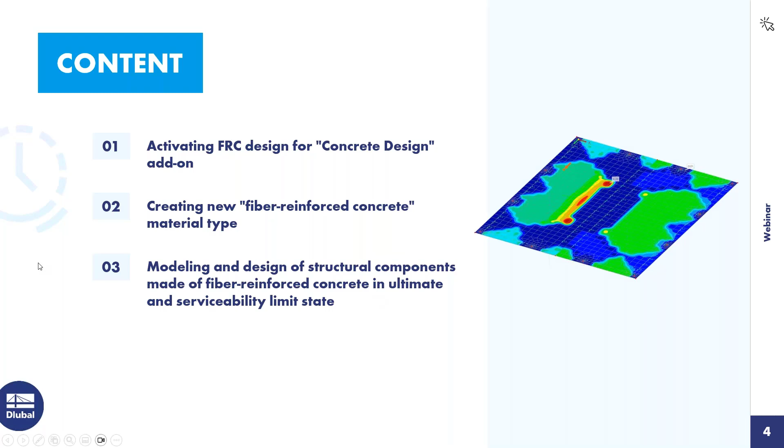Please email questions to info@dlubal.com. For today's agenda: Paul will activate the fiber reinforced concrete design by creating a new material type, then he will model and design the structural components and perform a design for the ultimate and serviceability limit state.

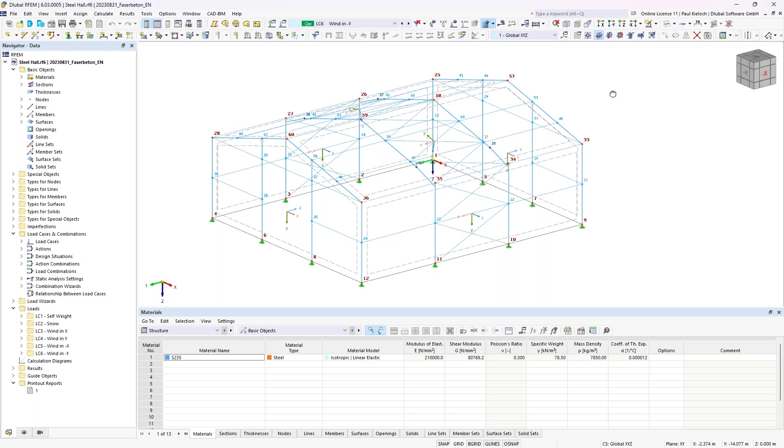As a short overview of this structure: I have nodal supports here on which I will get support reactions. These support reactions will give me the loads for the slab. I have basically 6 load cases - self-weight, snow, and 4 load cases for the wind load. What's also important to mention is the numbering of the nodal supports or nodes, which I will use again in the second file where I enter the slab.

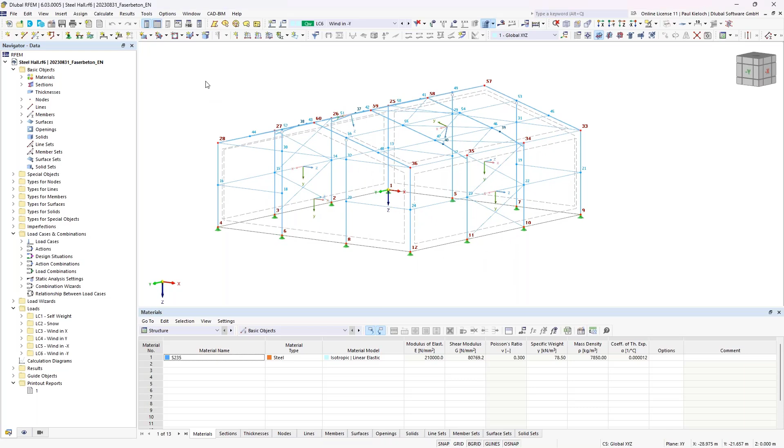So I will create a new file. What's important now is that the steel building and the new file for the slab are in the same project folder in our Dlubal Center. That's important regarding the new option in the load wizard to take over the support reactions as loads. I'll come back to this topic and mention it again later.

Now I'll just enter the name here - that will be foundation slab - and I will activate the concrete design add-on. So what I'll show you today is basically part of the concrete design add-on. We will create a fiber concrete material, and the design itself runs in the add-on for concrete design. For the standard, I will use the national annex for Germany, but the features I'll show you today, the design approach and equations, are also part of the other national annexes for Eurocode 2.

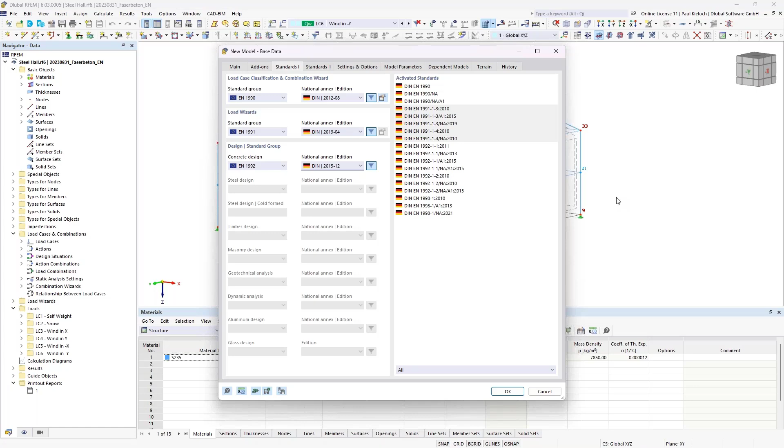Okay, that's basically all. One thing I have to check is that the Load Wizard was activated, because we will need it afterwards. That looks good - can confirm it.

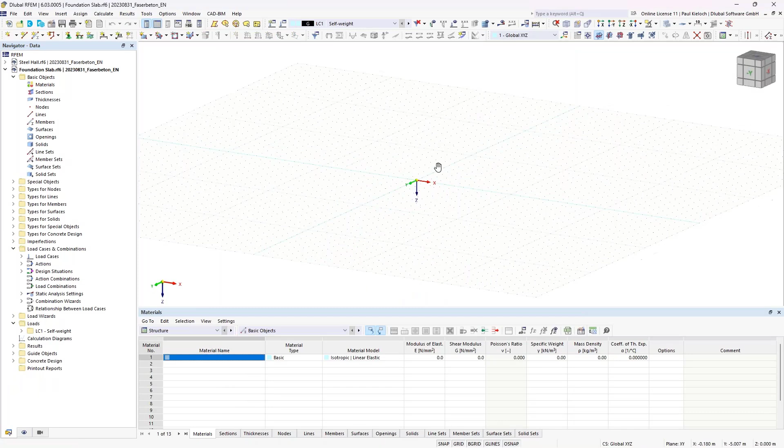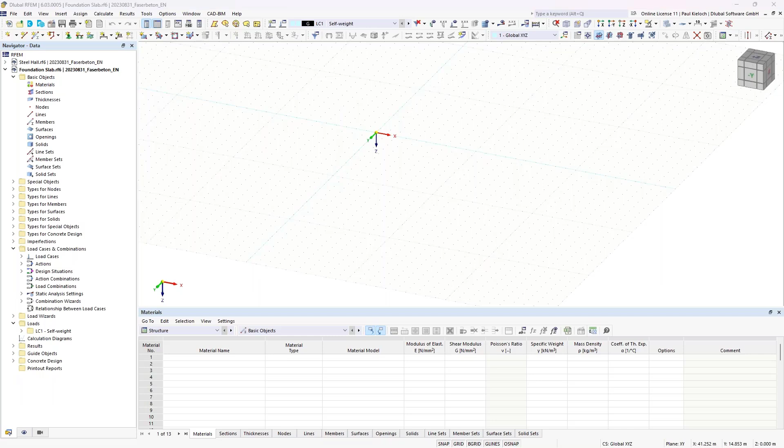A new file was created, and I'll switch back to the structure with the steel building. I'll select my nodes here, and with Control C and Control V I can import it here, copy and paste.

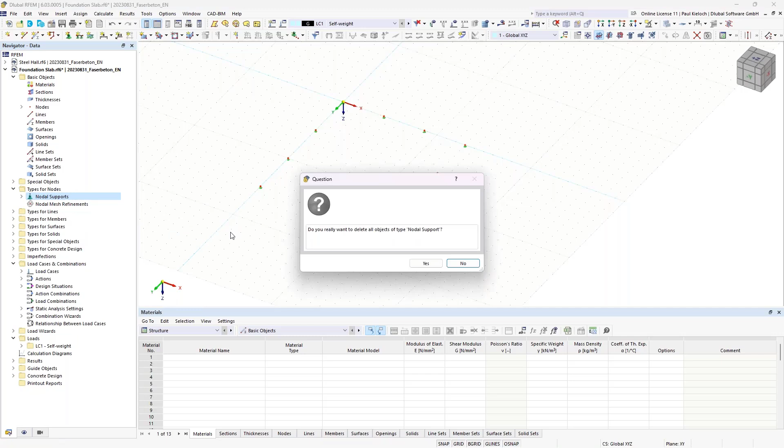So we now have the position of our nodes with the columns from the steel hall, and I don't need the lines or the nodal supports here. So I can delete the lines, open this chapter types for nodes, delete the nodal supports as well. What we now have is just the nodes for the columns.

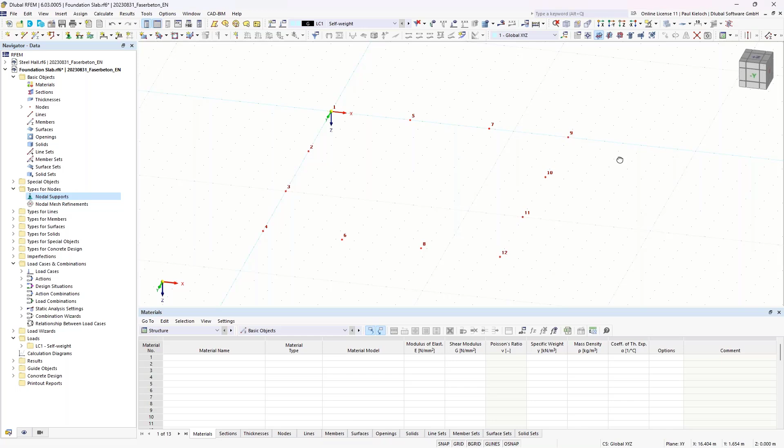If I right click and activate the numbering, we see exactly the same numbers as in our file with the steel building. That will be important afterwards if we transmit or transform the support reactions to nodal loads. I'll switch off the numbering just to have a clear overview of the structure.

Next topic is creating the material for the slab. I'm entering a new material, going to the library, and selecting this fiber concrete. Fiber concrete was already implemented in previous versions, so it was already possible to create a slab with material type fiber concrete.

But what's new in the latest version is that slabs with material type fiber concrete are now also considered in the concrete design add-on. That's basically the new feature I'd like to show you today. So I'm setting up the filters here and selecting this material.

Now you see this material type fiber concrete. If that material is assigned to a slab, the concrete design add-on knows that it has to use the approaches for fiber concrete, or fiber reinforced concrete material, in the add-on.

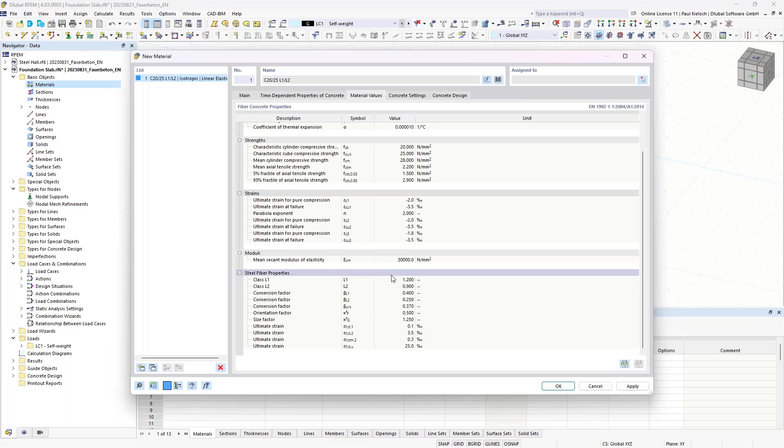The next material I need from today's example is steel, reinforcing steel. I'm setting up these filters once again, and then we can select reinforcing steel, and I'll use this B500 here.

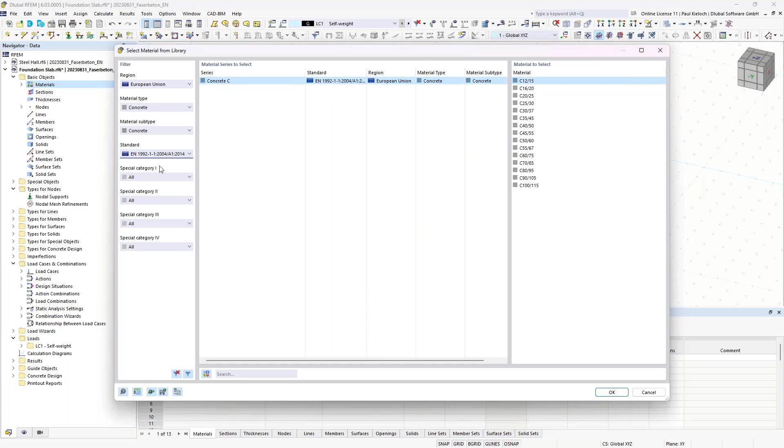Afterwards I'll also do a comparison between this fiber concrete and a normal concrete. So I'll create a normal concrete material, concrete and Eurocode, this one here. So basically I have both concrete materials, C20/25, but the first one includes fibers or fiber reinforcement, and the third material here is a regular concrete material.

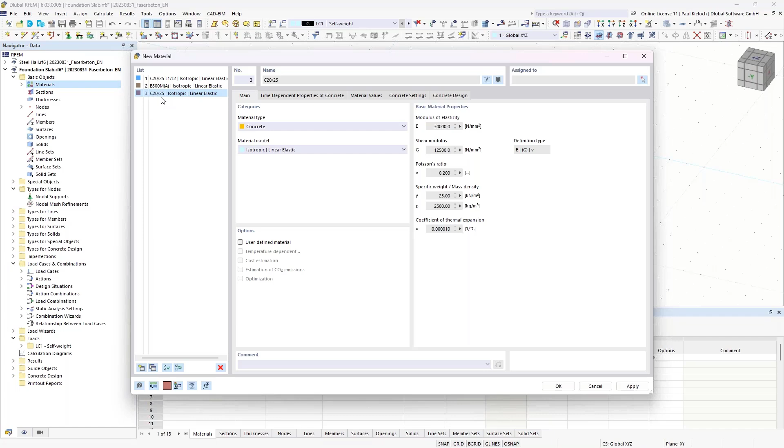Confirm that, okay. The next topic is entering a thickness for the slab, which will be 240 millimeters - once with this fiber concrete, and for the comparison with the regular concrete.

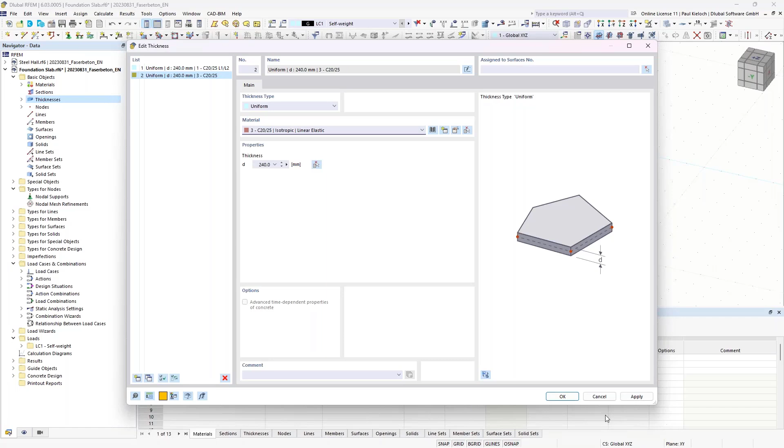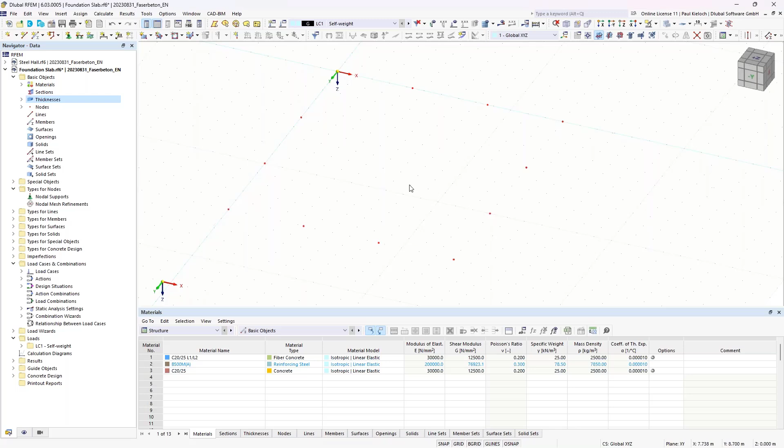So now we could import or enter the slab. I'd like to have a spacing of the edge of the slab to the center of the columns of 30 centimeters. To enter it graphically, I just modify the grid here, entering 0.3 and 0.3 in both directions.

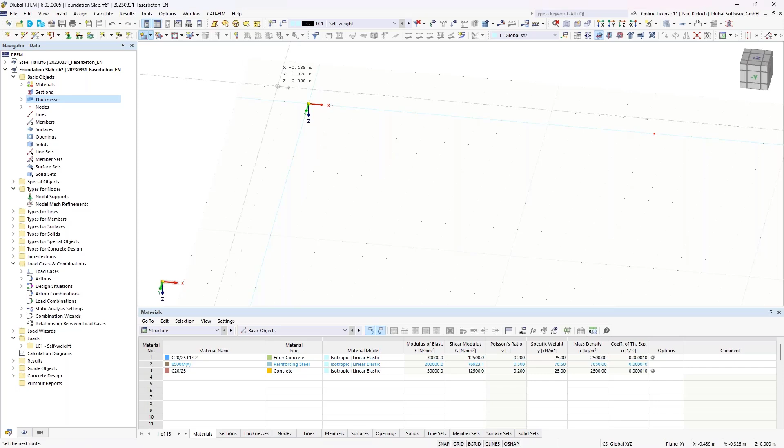Confirm with OK. Now I can enter the slab with the thickness of 240 millimeters and the fiber concrete material, click OK. Then we have the first point here and the second one on the other end, and here I just have to modify the origin of the grid, and then it looks like this.

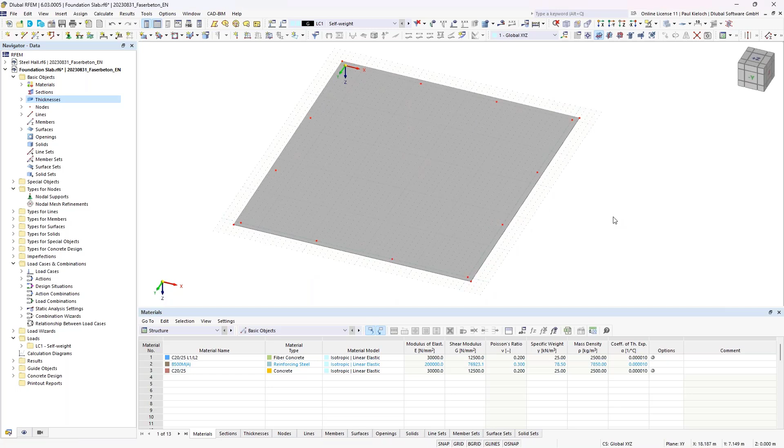And the slab was entered. Just to have a better overview, a clearer overview, I will switch off the grid and also the snapping points of the grid.

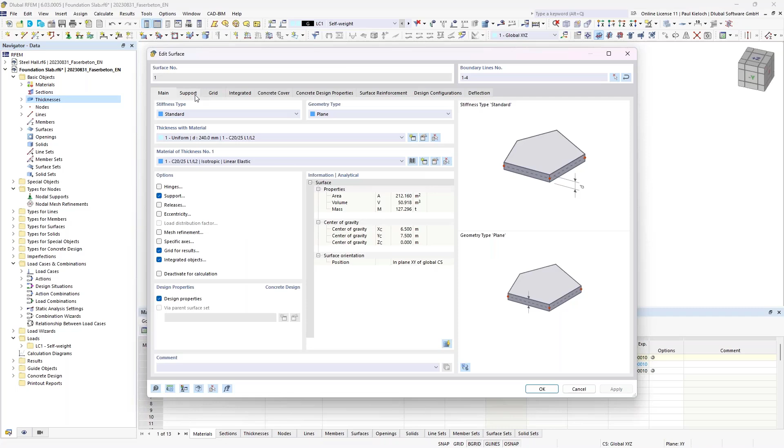Next topic is modification of the slab itself. So we will first enter supports here. I will use a surface support with random stiffness. I could probably also enter a solid with the geotechnical analysis add-on, but that would be more time intensive, so I'm just using random spring constant for this example today.

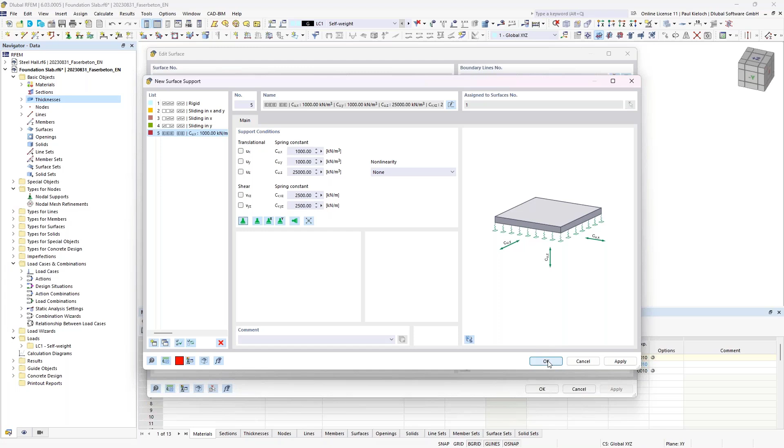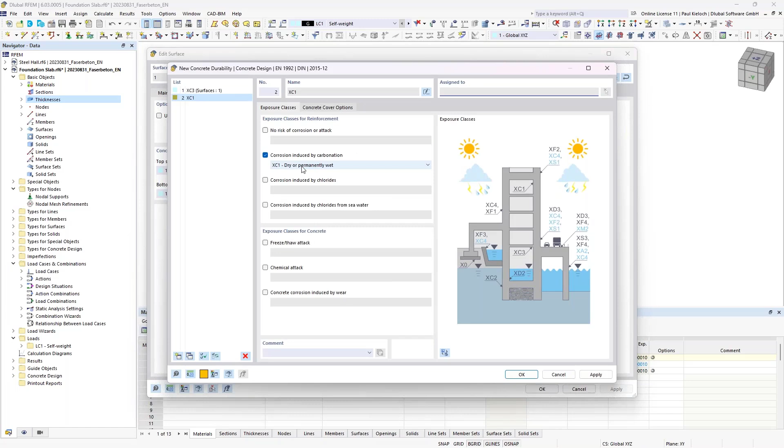Entered. The next topics are regarding these chapters for concrete design, so we have to check our concrete covering. I will use XC3 at the top side, and at the bottom side I will create a new one, and this should be XC1.

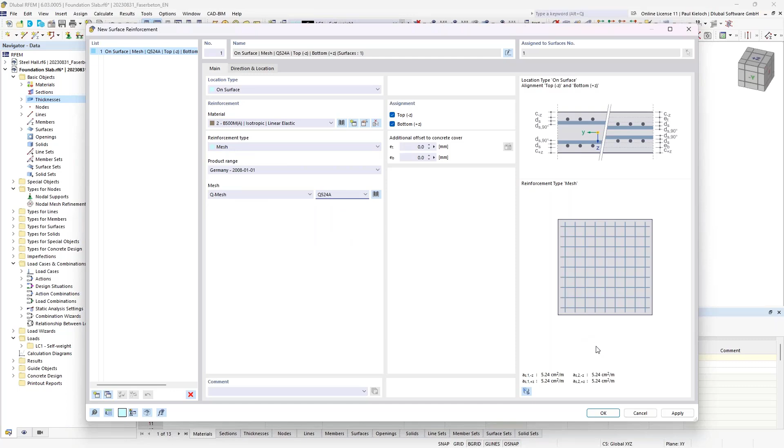If you now wonder why these values won't be applied here, that's because the surface reinforcement is missing. I will just enter it here with a mesh, using this mesh from the German product range. If I confirm that and go back to the concrete cover, then you see that the concrete covering was applied correctly.

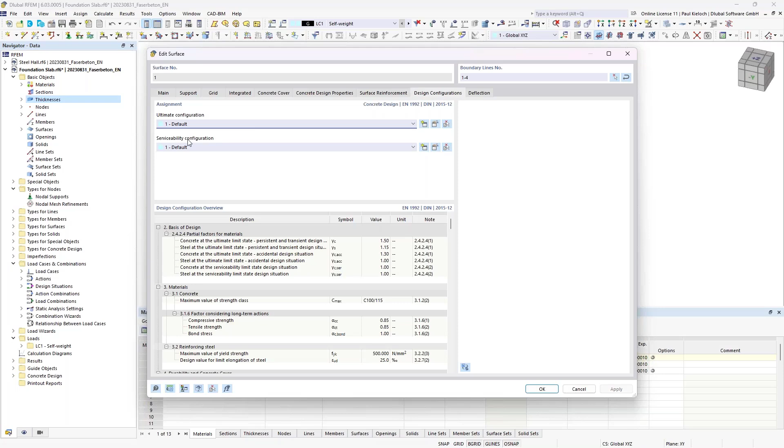What I have to change or modify in the tab with the design configuration is regarding the serviceability configuration. If I'm designing a foundation slab, I can think about changing the setting regarding the AS-min calculation due to restraint. In my example, I would like to use pure tension restraint, so I'm switching this option to pure tension restraint.

And what's also possible, or at least according to the German National Annex and the commented version of the German National Annex, it is possible to reduce the tensile strength of the concrete by a certain factor. It's depending on the thickness of the slab. According to the German National Annex, it would be possible to use the reduction factor of 0.65 for slabs up to a thickness of 30 centimeters, so I will do so for this example.

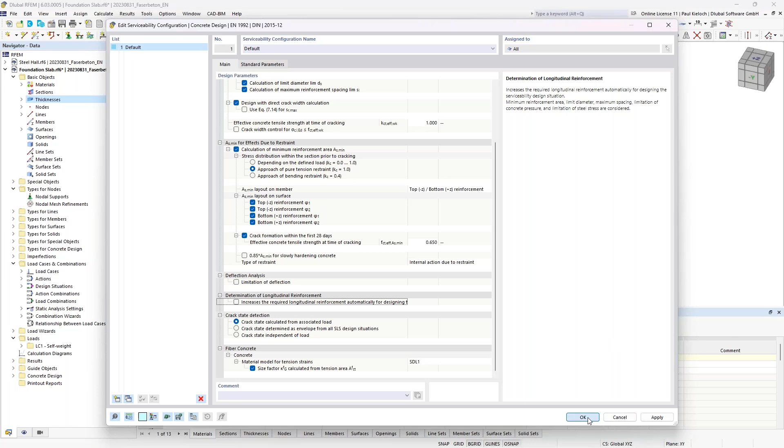For this example, I would like to deactivate the deflection analysis because that's not required here. I will also deactivate the automatic increasing of the longitudinal reinforcement for serviceability. That's basically all I have to change in the serviceability config. I confirm that once again, and then we see our slab already with the reinforcement. Just to have a better overview, I'm deactivating the reinforcement so we see our pure concrete slab.

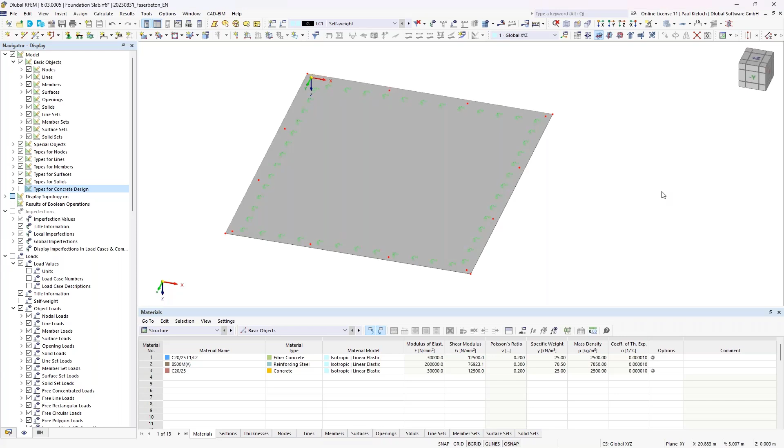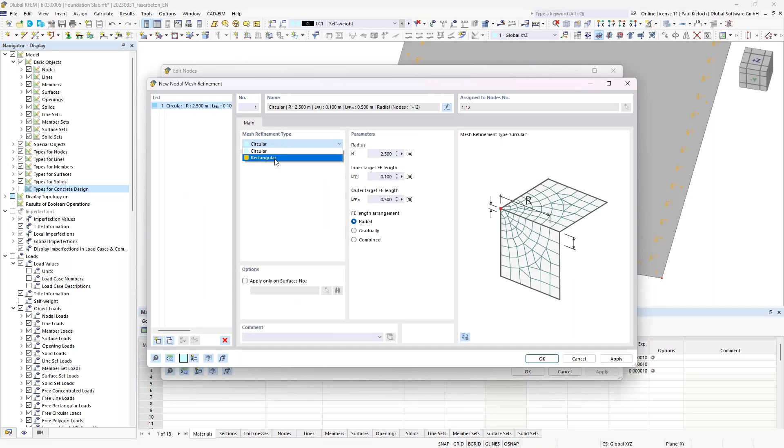Okay, the next topic I have to enter is the FE mesh refinement on the nodes. I'm switching maybe to this view. I'm selecting all the nodes on which I would like to apply the load afterwards, and I will assign a FE mesh refinement, using this rectangular one with a target length of 5 centimeters in the first element next to the node.

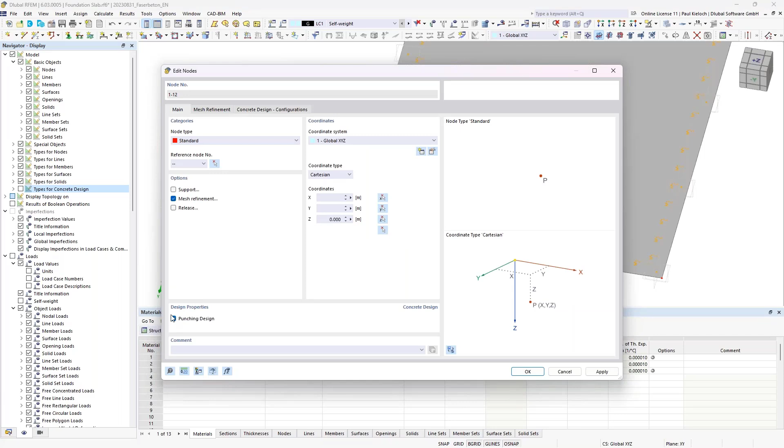And what I would like to activate in the same way is the check for punching. If I do so, then this tab appears with the configuration for punching. In this example, we have to check the configuration regarding punching because we haven't entered any columns, so the program has no information about the section dimensions. In the current setting, the program would not be able to generate the perimeters for the punching.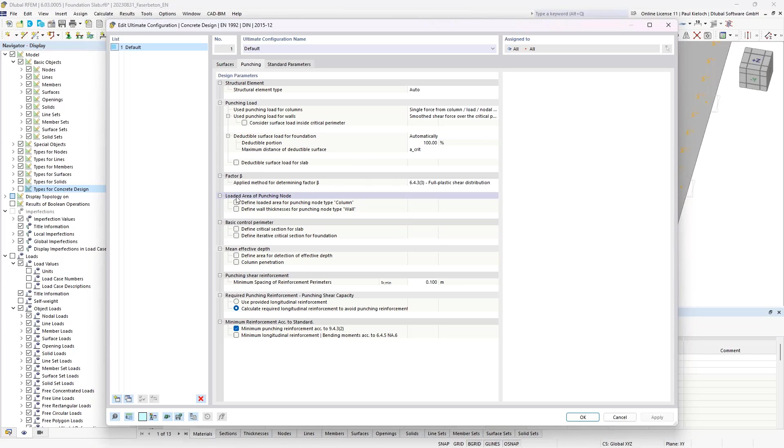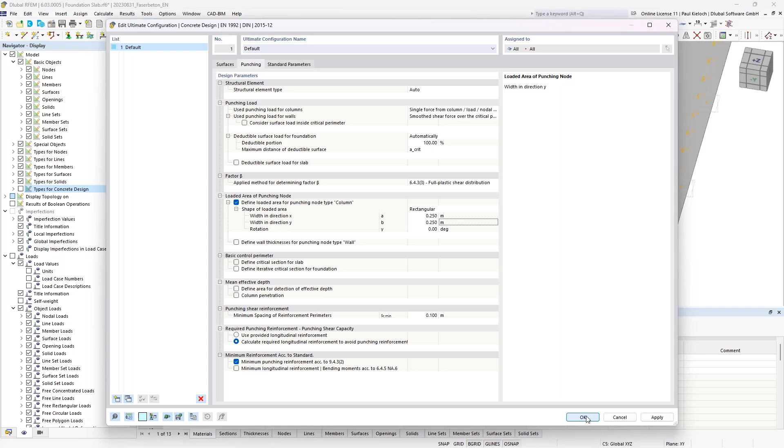So therefore I can define a loaded area, and I would use 25 centimeters in both directions for these nodes. With this setting I will be able to do the design checks even if I do not have a cross section entered for the columns. That looks good, we'll confirm that.

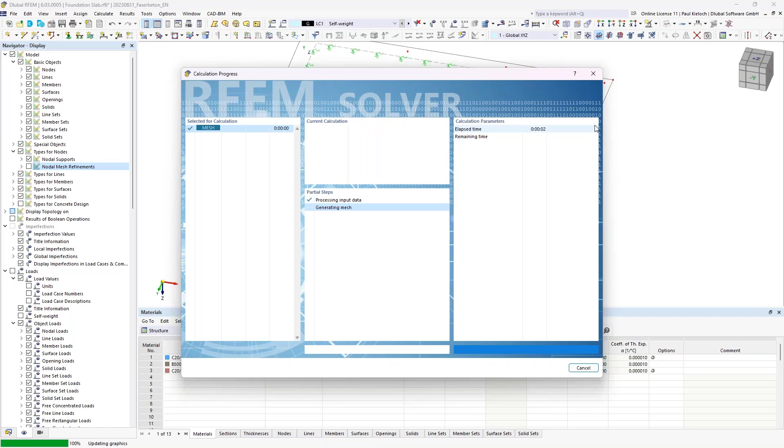If I switch to the wireframe display mode, then we see these nodal FE mesh refinements. I will deactivate them, and if I generate the FE mesh, then we see that all refinements were activated or considered correctly.

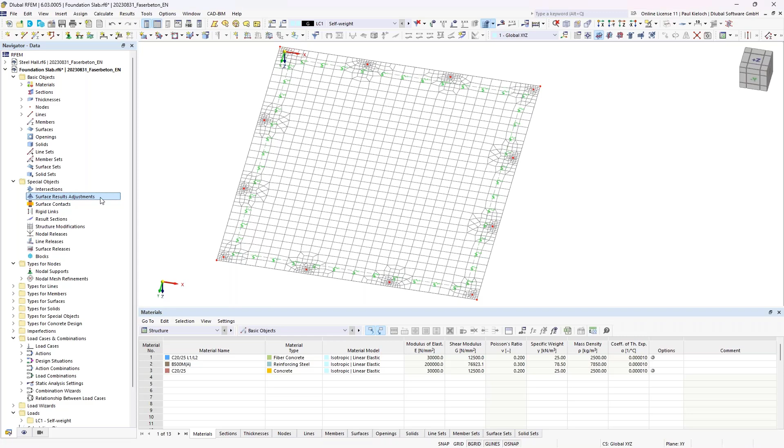And the last topic I have to enter regarding the FE mesh is in the special objects, the surface result adjustment. I would like to use smoothed results inside a certain result adjustment, so I will enter them here for slab number 1, and they will have a dimension of 0.5 meters, and the first one is here. Can confirm that.

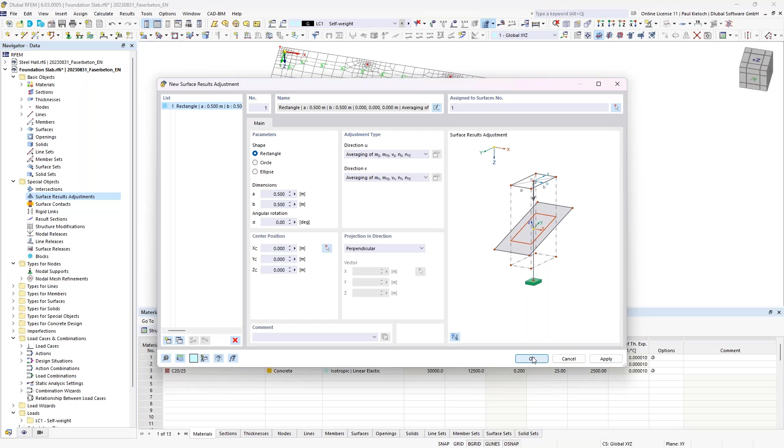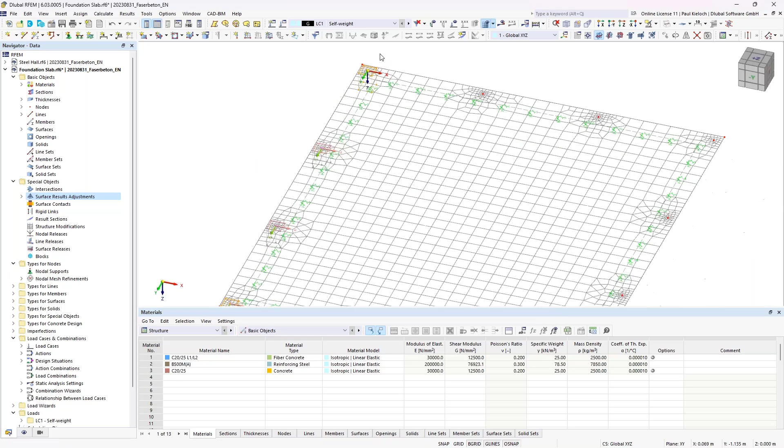And now I can select it, click on copy 3 times from that point to that point. And then I will take these here and copy them also 3 times, but this time from this point to this point.

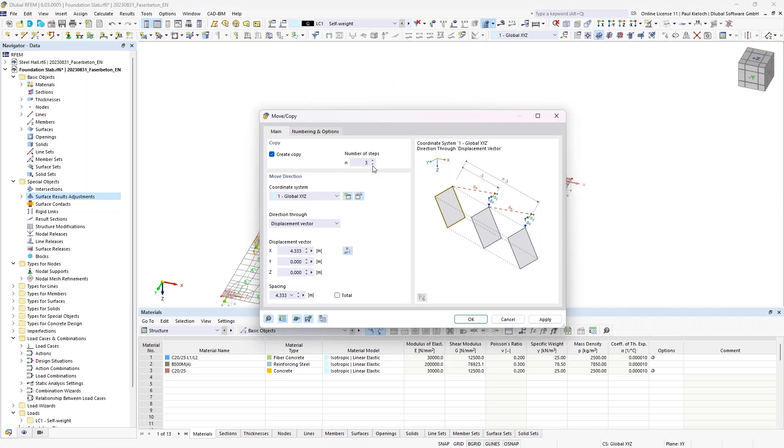And then I will select these two. Just one copy from that point to that. So, okay.

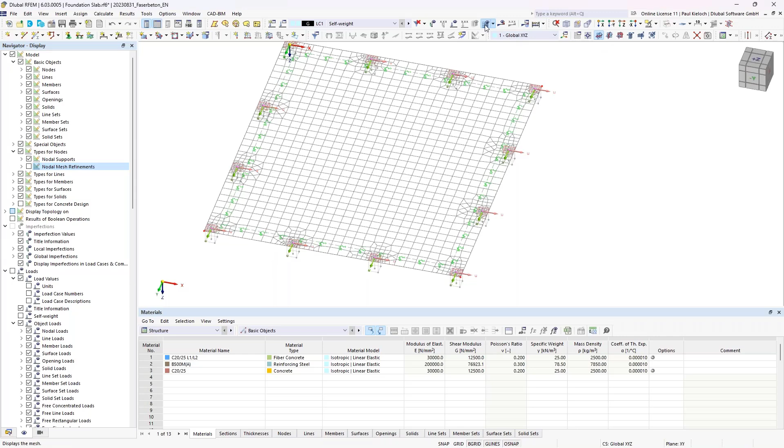And the surface result adjustments are now entered. I can just check whether they were applied. Yeah, looks good. So just to have a clear overview, I can deactivate the mesh and also switch to the result objects and deactivate here the surface result adjustments. Okay, that looks quite good so far.

So I will just save the file and now take care about the loading.

As I have already shown you in the steel structure, we have here 6 load cases from the steel structure. I will enter them here, so therefore I'm opening this dialog.

The first one is self-weight, it's okay. Already the second one was the snow. Then we have wind in plus X. Okay, and then I can just make plus Y. Then minus X and Y. So these are the load cases from our steel structure, and I will add also a 7th load case.

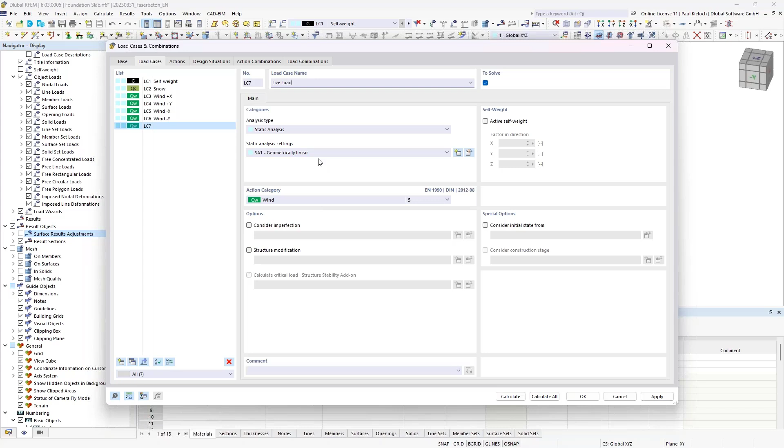That will be the live load on the slab, and therefore I'm using here storage areas. Okay.

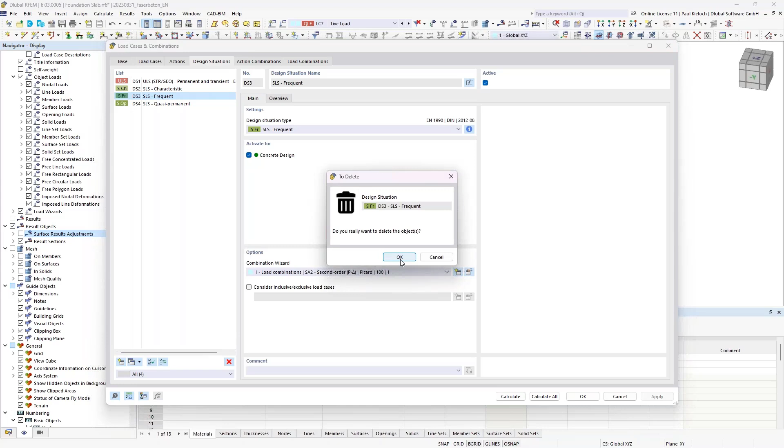Regarding the actions, that was filled correctly here automatically. Then regarding the design situations, I do not need here this frequent, so I will delete it just to reduce the amount of calculation time.

And before the load combinations will be generated, I can take a look at the action combinations. Just to avoid too much calculation time in today's example, I will just activate these action combinations where all 4 action categories are active. The other ones I will deactivate. So it looks like this.

And if I click on the load combinations, then I have basically these load combinations to consider today for the webinar. Okay, that's all so far. So we can confirm that.

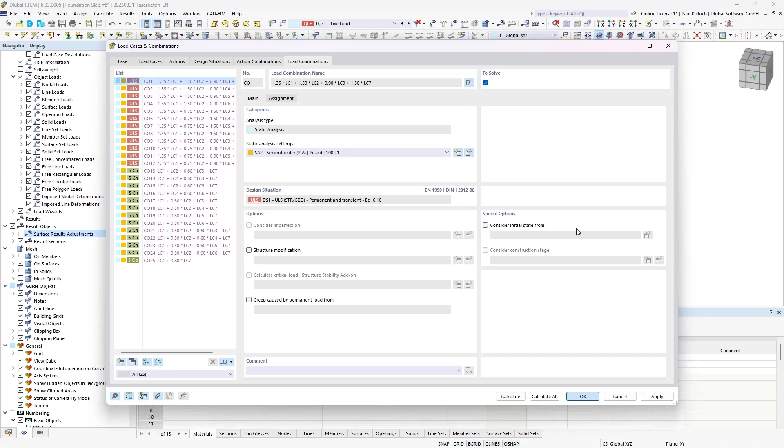The next step is now to import the support reactions from the steel structure into this file with the slab. Therefore, I'm going to the load wizard, and if I open here this chapter for the load wizard, maybe I'm just shutting down this a little bit, that it's better for overview.

If you go to the load wizard, then you find here a new option, import support reactions. That is a new option since version 6.3.

Then we can create here a new load wizard, and now you can find in this tab model all the models inside a project folder, or in the same project folder where also the foundation slab is stored. So I have my steel hall in the same folder as the foundation slab, so the steel hall is here accessible.

Then I can switch to the objects and enter here that I would like to use the support reactions of the nodes 1 to 12. I have the same numbering, so I can directly enter 1 to 12 here and then switch to loading.

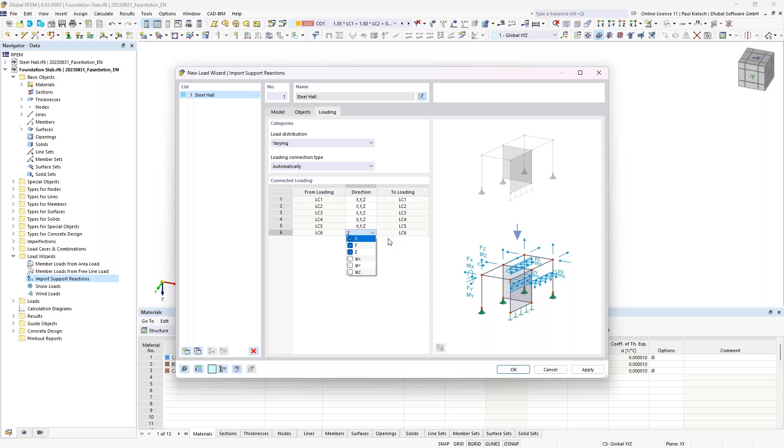Then I can click on OK, and maybe I switch to the self-weight. What you now see here is the imported load. In this state, you just see these question marks. That comes from the fact that the program does not know at this point the value of the load. That will be calculated now if I hit the button for the calculation.

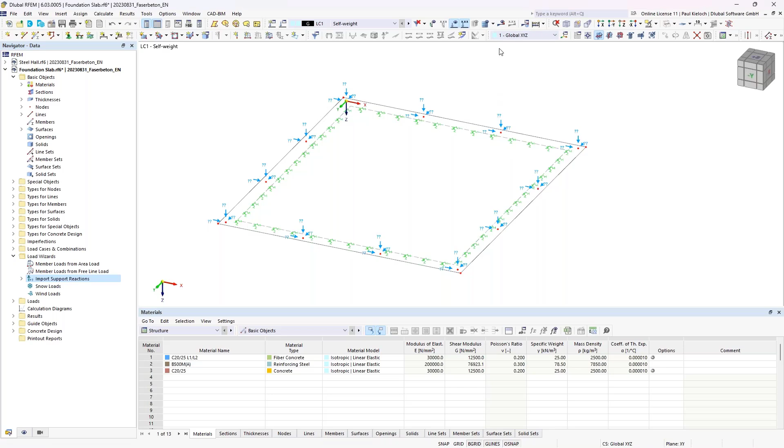Then the program will at first calculate the support reactions in the steel structure once again. So you see it here, steel hall, steel structure, and then it will import the loadings to our foundation slab file.

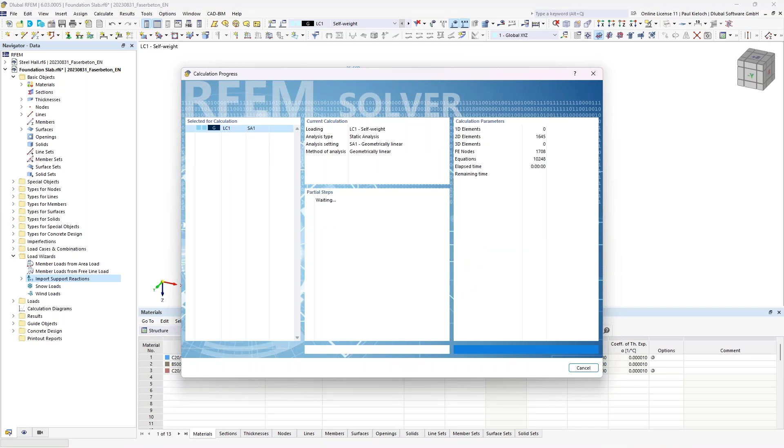So both files are now combined together. If I would update anything on the loading of the steel hall, the program would automatically update here this loading. That's also new compared to RFEM 5. In RFEM 5, this was a free nodal load. Now it's an object load, so a nodal load, and it's always in context to a certain node, so that we can also use it for the punching. And both files are now connected together regarding the update process.

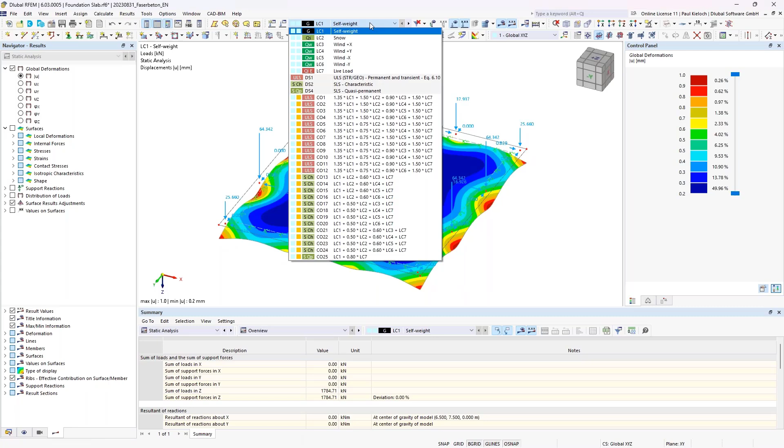So that is new in RFEM 6 now. Basically, that was everything regarding the modeling of the structure and the load. We have also our combination done so far.

So I can go over to the add-on concrete design and just check the input data here. I'm going over to objects to design. What's important now is to check that the slab to design is number 1, that's okay. And our nodes 1 to 12 are active here, displayed in this column to design. That's also a hint that the input data was correct and the nodes are correctly activated for design.

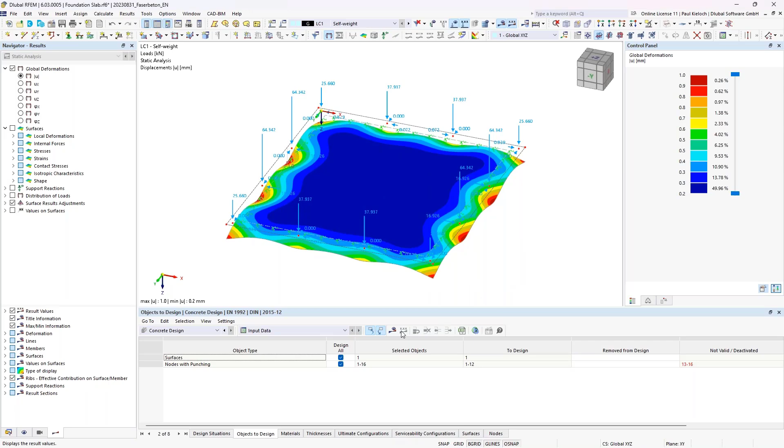With these settings, I can basically start the calculation of the add-on. So you see now here, once again, this batch for load. That means in the first step the program will calculate the original file where we would like to import the support reactions as loads, and then do the usual calculation step of calculating the internal forces of the slab, and now the concrete design add-on. I guess that should be done in some seconds.

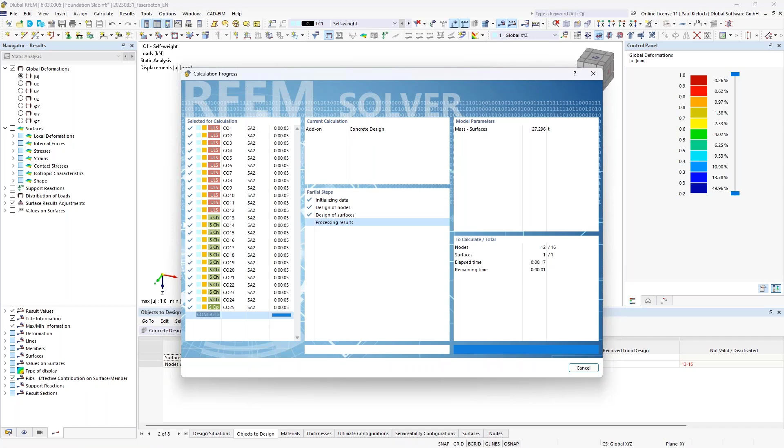Now we should be able to check the results here. Maybe I'm switching off the reinforcement here and also the design checks on nodes, and we take care about the surface results at first. So I will open here this results navigator, and maybe also the serviceability and ultimate limit state.

What the program actually does is it modifies the already existing equations from the Eurocode 2 according to this mentioned design guideline from the German Committee of Concrete Design. That means the equations of the Eurocodes will be modified or extended according to this guideline, and that's also the reason why we need a reinforcement here.

So if you do the design in the concrete design add-on, it's currently not possible to do the design just with fiber concrete without a regular longitudinal reinforcement. You always need a regular surface reinforcement for the slabs, or if you would do this for members, then you would need a longitudinal reinforcement or a shear reinforcement, and the program would then just modify the equations from the Eurocode in terms of the fiber concrete or fiber reinforced concrete material.

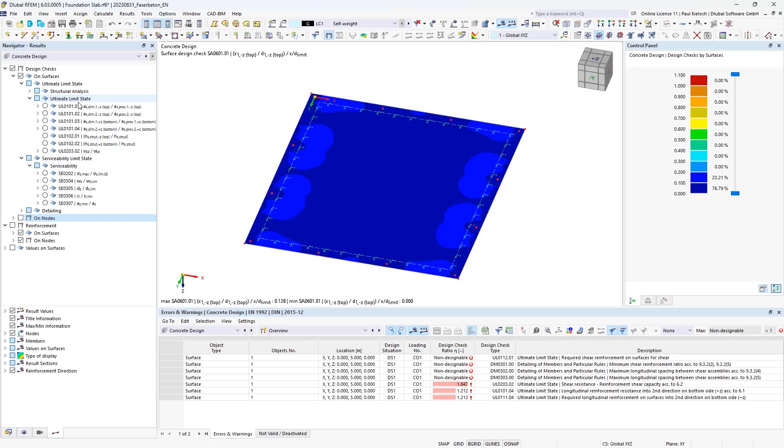So if we go through these individual design checks, let's say we take a look first at the ultimate limit state. If I activate it here, then we see that basically it is a problem of punching, I would say, in this example. But I would like to show you this: if I open here this detailed results, then you see this little f here as an index, and this shows you the shear capacity in consideration of this fiber reinforced concrete.

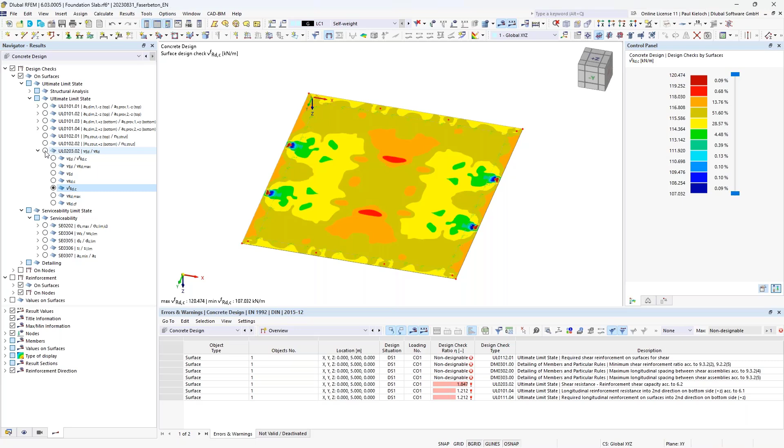So every time you see this small f, it means that this is in consideration of the fiber reinforced concrete. If I switch here to this intermediate result, you see in the panel that these values are a little bit lower. So that is the result or shear capacity without the fiber, and this one is including these fibers. The fiber reinforced concrete will be considered for the ultimate limit state design checks and also for the serviceability.

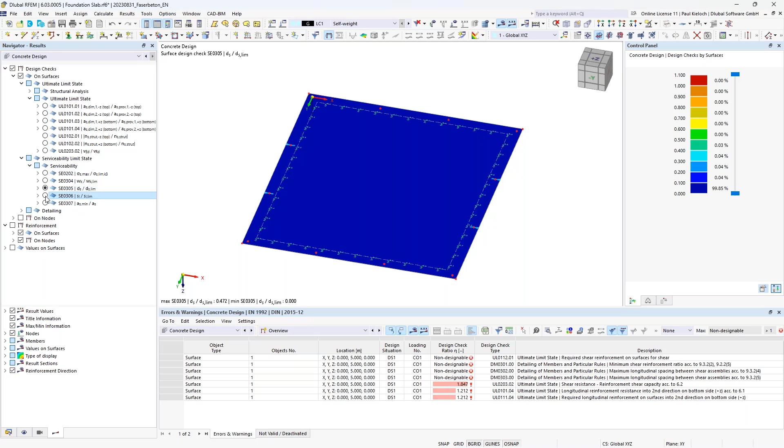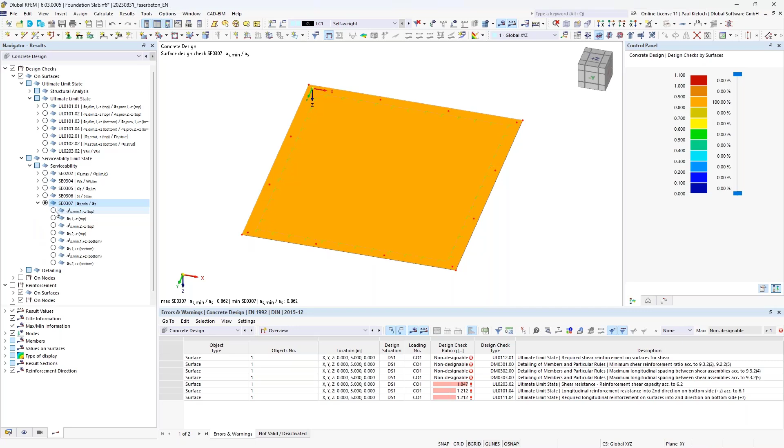Maybe I'm switching over to the serviceability. It's the same here. All the design checks are fulfilled now for this example. What's for such slabs maybe the most decisive result is the minimum reinforcement due to restraint, and in this example I'm almost at 90%. I can also check here the required amount of reinforcement due to this restraint, and there you see exactly the same like for the ultimate limit state.

You see this small f here, and this shows that this minimum reinforcement is in consideration of the fiber reinforced concrete. I will do afterwards a comparison of fiber reinforced concrete and normal concrete. The last point I would like to show you here regarding the results navigator is the results for the punching.

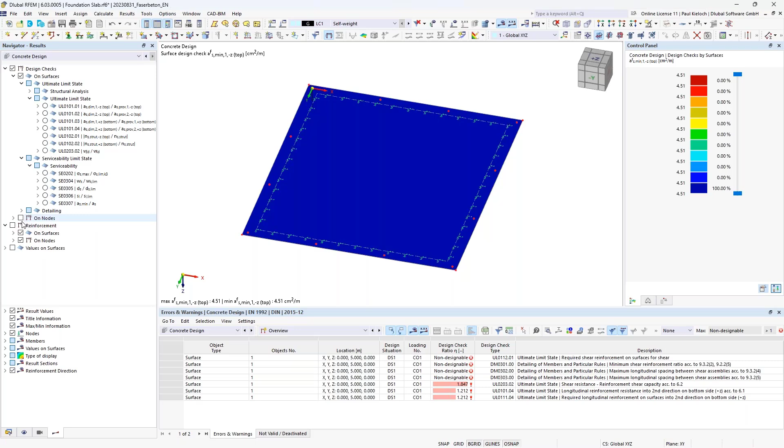So as I said before, for this slab, punching is maybe one of the decisive design checks. And for the punching, if I'm switching off the results on the slab and activate it here on the nodes, it is basically the same. You have here also the small f, which shows you that this fiber reinforced concrete material will also be considered.

In the design checks for punching here. That's regarding the results navigator. If you would like to check it in a more detailed way, then you can switch over here to the design ratios on surfaces, for example.

And if we go here to the shear capacity or shear resistance design check, for example, do a double click, then you see here these equations, and this is, as I said before, the short expression for the Deutscher Ausschuss für Stahlbetonbau, so the German Committee for Concrete Design.

Basically here you have the information how this guideline modifies the original equation from the Eurocode. So that's also important to know, because, as I said before, it is a modification of a regular reinforced slab, just with consideration of fiber reinforced concrete material. So you see here these equations which are used for the design checks.

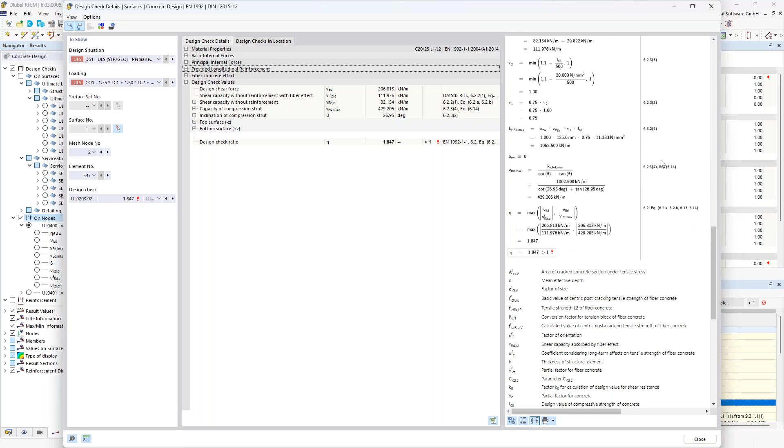That's for the shear capacity, and the same is also for the, I have to check where we find it, the design ratios on surfaces. Here for the serviceability, yeah, for the minimum reinforcement, it's the same.

So I can show you these results here. There we have the same. If I would like to check here how the program is calculating the amount of required reinforcement due to restraint in consideration of this fiber reinforced concrete, then I can also go here to the design check details.

And if we go here down a little bit, then you find here, as I already mentioned, this guideline, the chapter in the Eurocode, then the equation of the guideline, and here you find how the program is calculating the minimum reinforcement due to restraint, and with the small letter f in consideration of this fiber reinforced concrete.

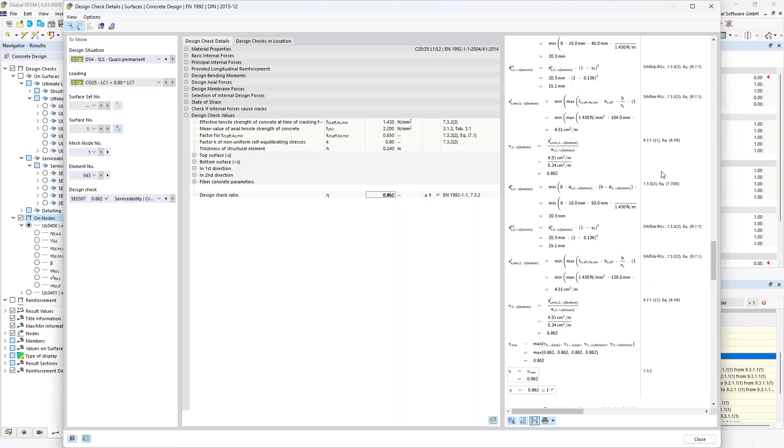Okay, that's regarding the results here. I guess that is pretty straightforward. So it is basically like you already know it from the regular results from the concrete design add-on.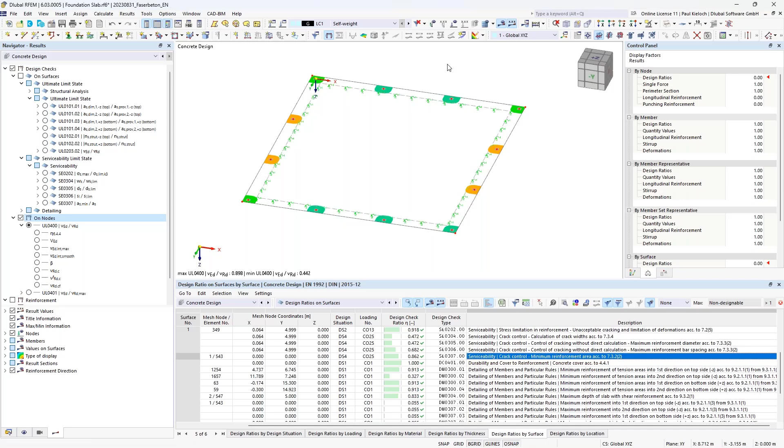Now to have a comparison between the material with fibers and the regular concrete, I would like to divide this slab in two parts. And therefore, I'm creating here just a line in the middle of the slab.

And then I can do a right click on the surface and divide this. And now if I switch on the numbering, then we see that the slab number 1 was now changed to slab number 2 and 3.

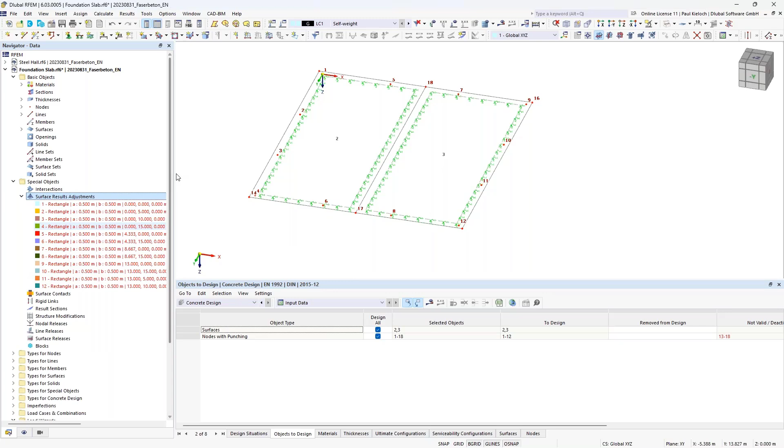That means that I have to take care about my special objects and the surface result adjustments, because they are assigned to a certain slab. So they are all still assigned to the slab number 1.

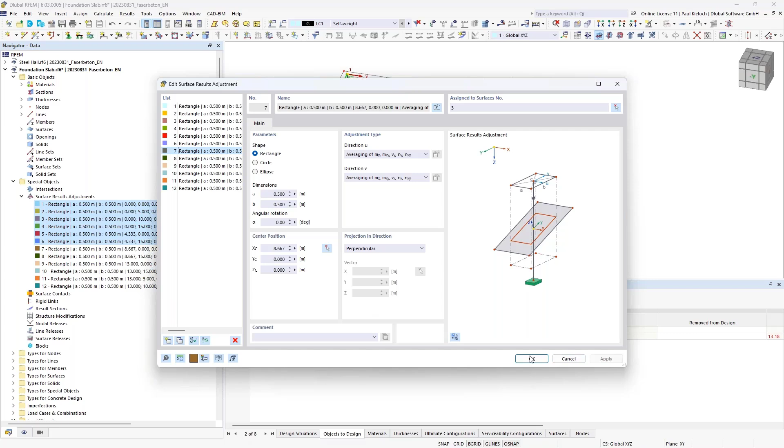Therefore, I can select here this first half. It is now, or it should be now, assigned to slab number 2. And this here to slab number 3. Okay, apply. And now they are in black again, so they are again considered correctly.

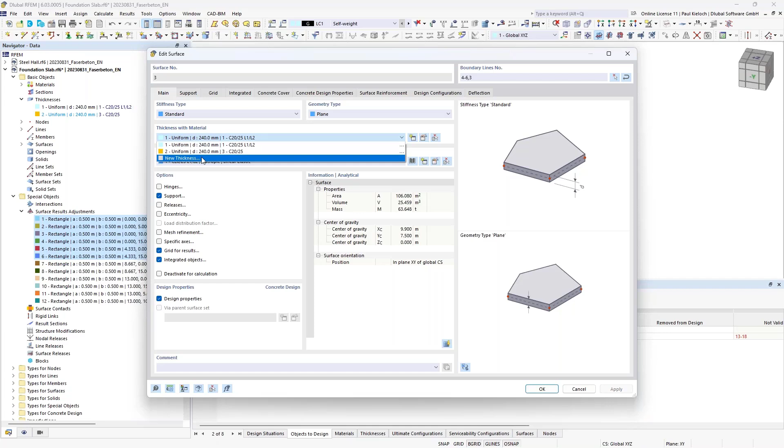What we also have to check is our material. I'm going over to the thicknesses. So the thickness number 1 is still used for both slabs. So I open here the edit surface dialog for the slab number 3 and just change here the thickness to this one.

And then this slab number 3 will use our regular concrete material, and the slab number 2 will use our fiber reinforced concrete material here for the design check.

We see also here in the table of the add-on and in the input data that we now have here the slabs number 2 and 3. So that seems to be okay so far.

We have still our 12 punching nodes here assigned. That looks also quite good.

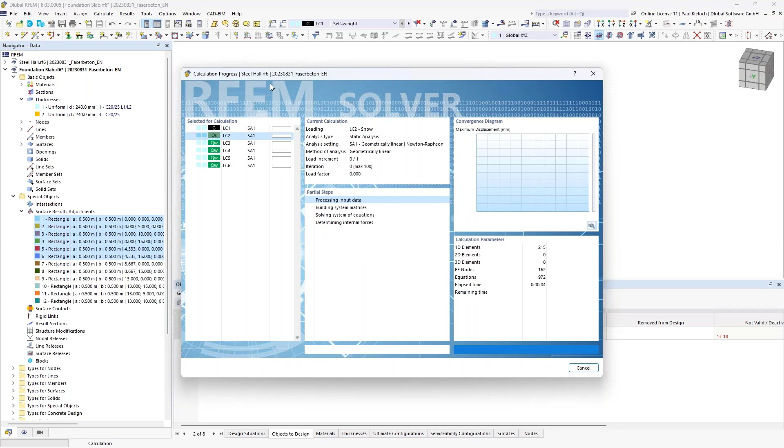So I can directly hit the button to calculate the results once again. So, and it's the same step as before. The program will update the loading from our steel hall and do the design in the concrete design add-on once again. So we have also the statical analysis once again and the concrete design once again.

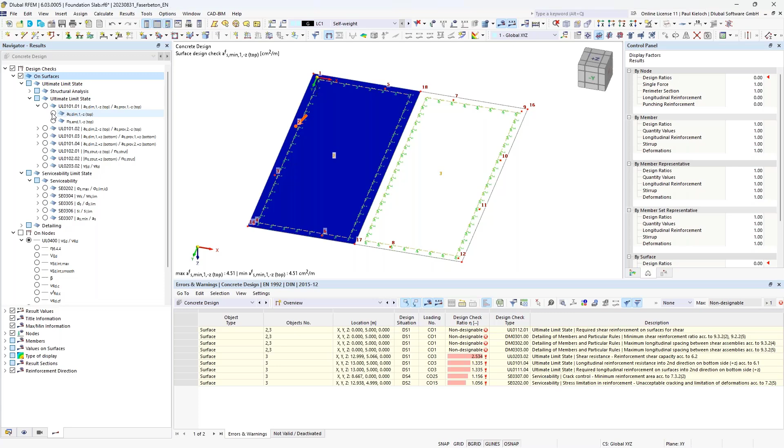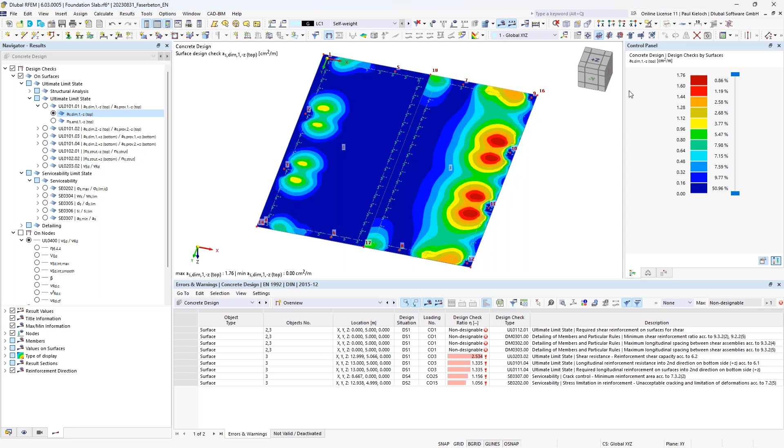Okay, let's check here the results on the surfaces, and I will go now to the required reinforcement here on the top side, maybe in direction 1. And now you see here the effect of the slab with fiber reinforced concrete, and here the regular concrete. So on the right side we now need more reinforcement. That is basically in all directions the case. Here the values are pretty small because of the loading.

In such examples, like for this foundation slab, the minimum reinforcement due to the restraint will be the most decisive result, I guess.

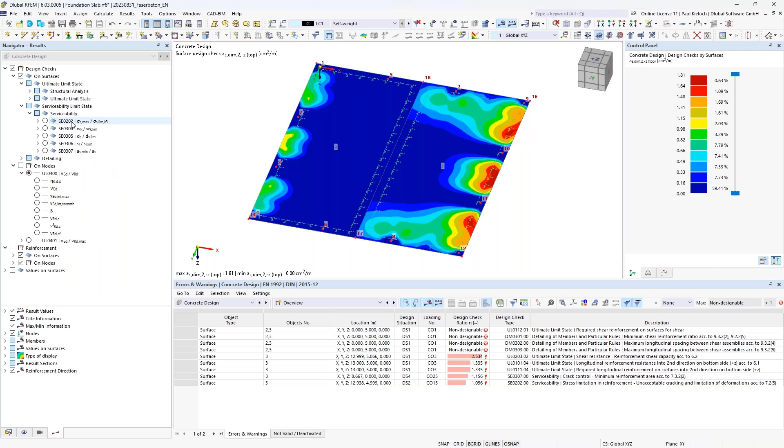So we can switch over to our serviceability results here. And if I click here on the design check for the minimum reinforcement due to restraint, we see now that on the left side, our design check is fulfilled with almost 90%. So it's the same value as before. But now on the right side, due to the fact that I did not consider here this fiber reinforced concrete, but just the regular one, the design check for the minimum reinforcement due to restraint is now not fulfilled.

So that is maybe a small example how you could use this fiber reinforced concrete material.

That's basically already the end of my today's presentation. I will just give you one hint regarding slabs that are not reinforced. That is maybe also a quite common use case. The approaches today are based basically on the equations of the regular Eurocode. And as I said before, we are just modifying these equations of Eurocode 2 according to this guideline of the German Committee for Concrete Design.